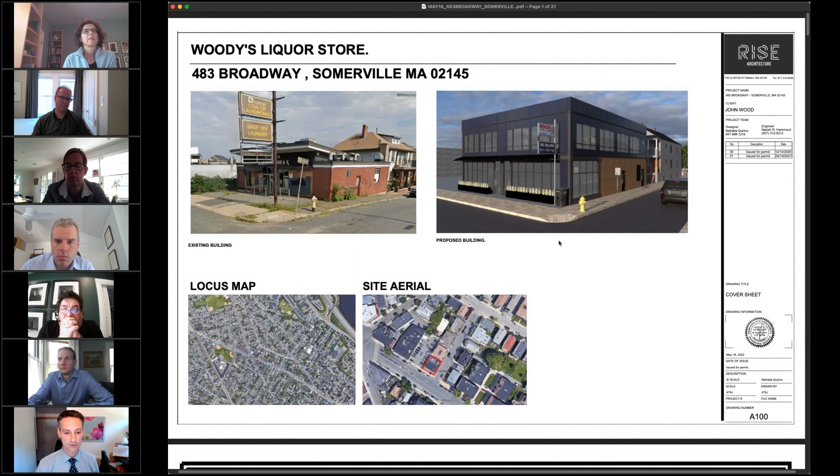Yes, excellent. So aside from the trash can located here, I think the exterior view of this has been updated. I think we discussed last time that might be a city trash can along the street as opposed to one in that location.

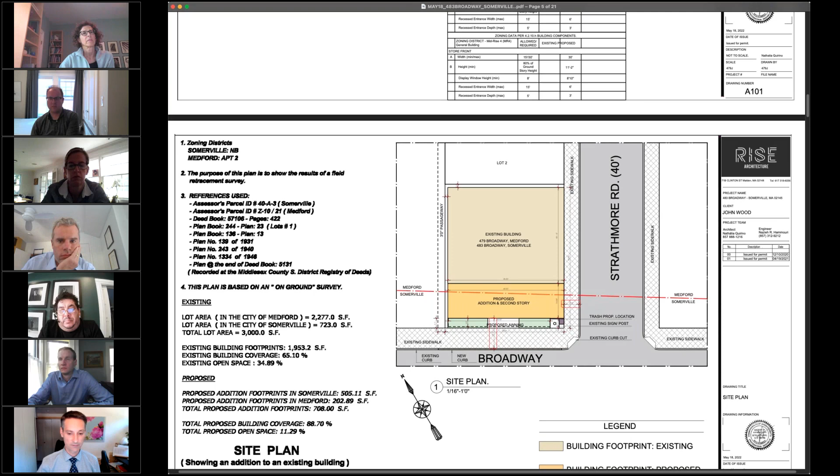I think the last rendition had a question about the distance of the building back from Broadway, as well as the sidewalk on Strathmore. So I'm going to zoom in here so you can see that we do meet the front requirements. I think the minimum is 12 feet from building to street, and right now we have 12 feet 7 inches, located here with this revision cloud.

The existing sidewalk is 6 feet 4 inches on Strathmore Road. I believe that came up because we have a door on the side that would be used for stocking the refrigerated area on that side street, so we'd be carrying down boxes and things on a two-wheeler into the space. Let me just zoom out again.

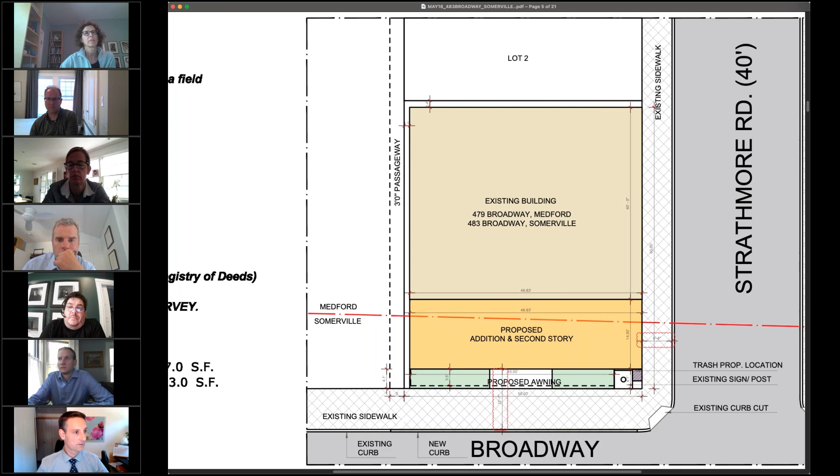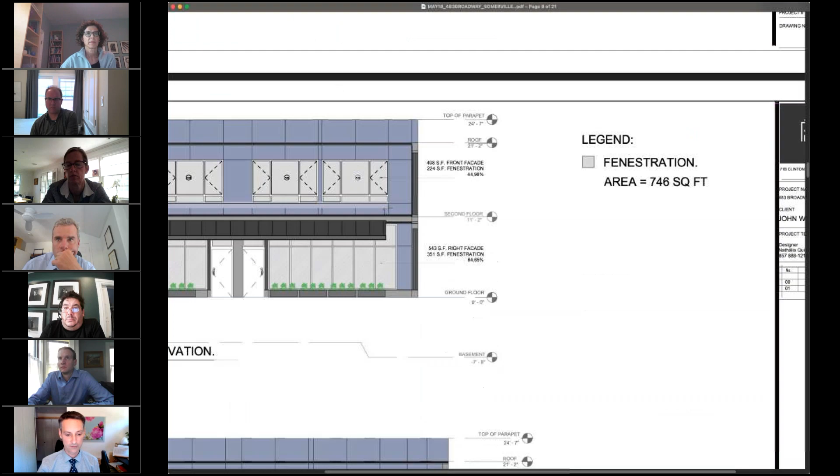Going down to the elevations here, this is where we had some changes. One of the things we wanted to do was revise the window layouts to be more symmetrical, at least with the floor below as well as with the entry doors right to left. So what we have now is a symmetrical assembly with the windows being the same on either side.

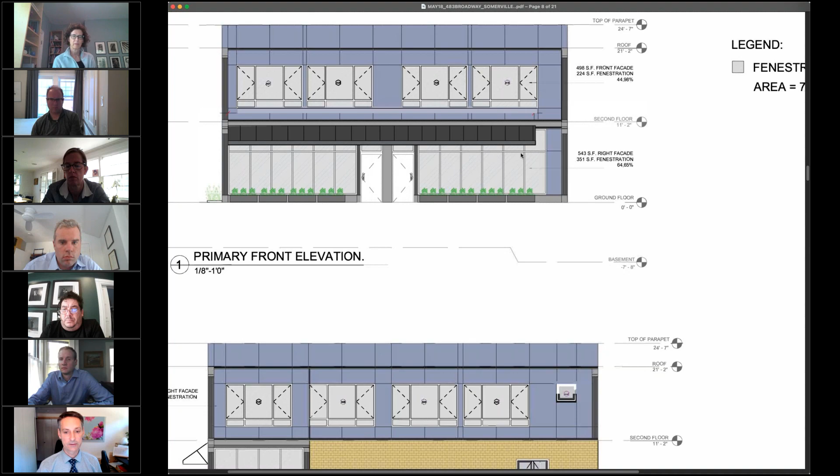Even though the space is slightly larger on the liquor store side, the symmetry exists between the upstairs windows, the downstairs windows, and right to left as well, and dividing of the lights to match the top of the doorways along here. That change was incorporated as well.

Looks like the awning didn't quite come across on that picture, but we're going to go down to the rendering here, which does contain the overhang coming out and across all the windows here. So we were changing the materials to be more in line with some of the more contemporary buildings. We'd be looking at perhaps an aluminum cladded paneling system around the windows and top.

But these colors were, I think, the ones that you guys preferred last time. And we did make some adjustments to the windows upstairs as well to reflect more of a commercial space.

I think there was one more change we made on the grass on the side here. As opposed to particular plantings, we just would have whatever we can get to grow on the ground there—maybe some grass or tall grass along the side, because we don't have a lot of space to work with, but we want to get as much as we can in along the side of the building.

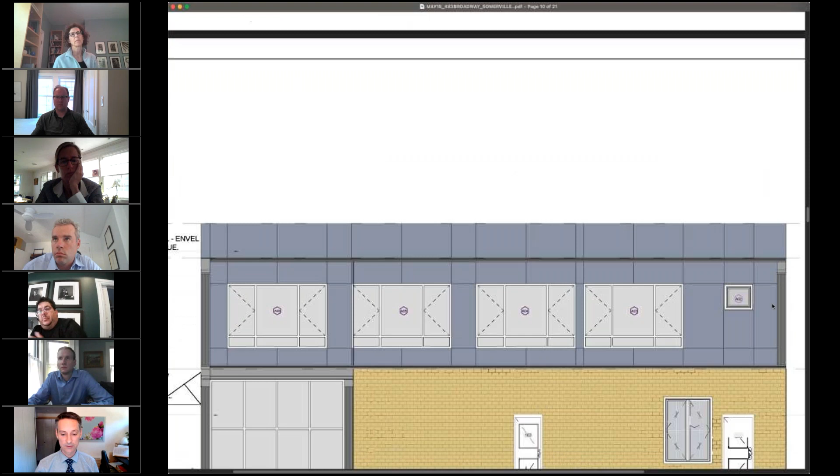So those highlight the changes we've made to the set and the elevations. Happy to take any questions as to what we've presented here.

You guys mind if we start with the landscape? Andrew says yes.

So a couple questions. One is, are those planters going to be irrigated? Because the position under the awning is absolutely going to limit the amount of rain they get, and even just being in planters is sort of problematic. So what is the plan for keeping that vegetation alive?

So the actual system itself we haven't really fully developed what it would be. It could be one single planter with irrigation built in. Right now we're showing smaller ones just because it creates a little bit different look, but I think the idea would obviously be to have them grow. We want them to grow, so whatever would be necessary to make that happen. Just trying to find my notifications here.

Okay, and the species that you specified, I was a little confused. What are you proposing? Boxwood in the planters, and then what is going alongside the building?

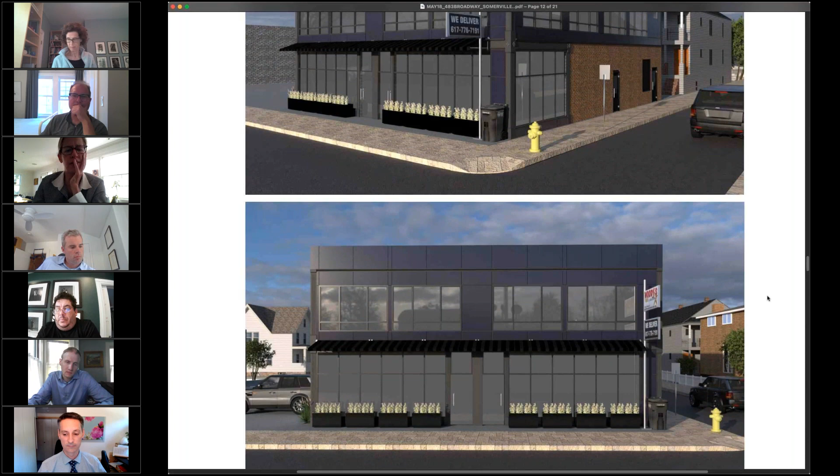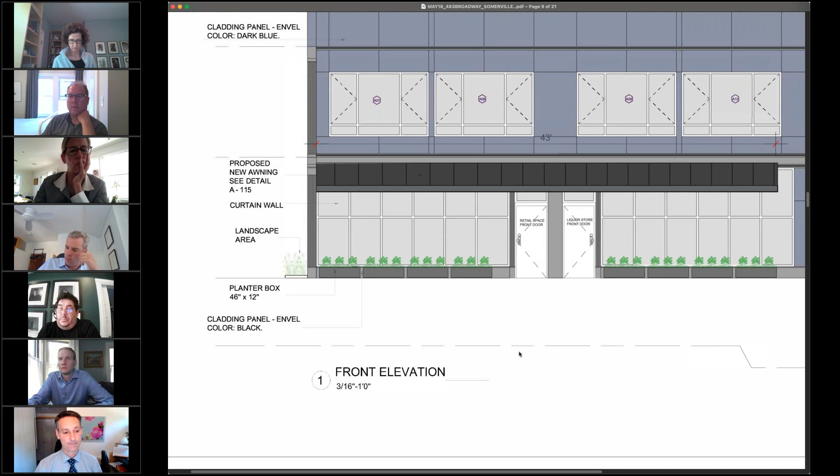Well, there was some concern last time about what would grow along the side, because if you look at the site itself, what we can actually work within is really about a foot, even though there is a 3-foot buffer beyond that. We can't really do anything in that zone ourselves, so we have about a foot to work with. Whereas there's really 4 feet of open space there, we really can't plant too much in that space. That would definitely work, based on what we have to actually plant.

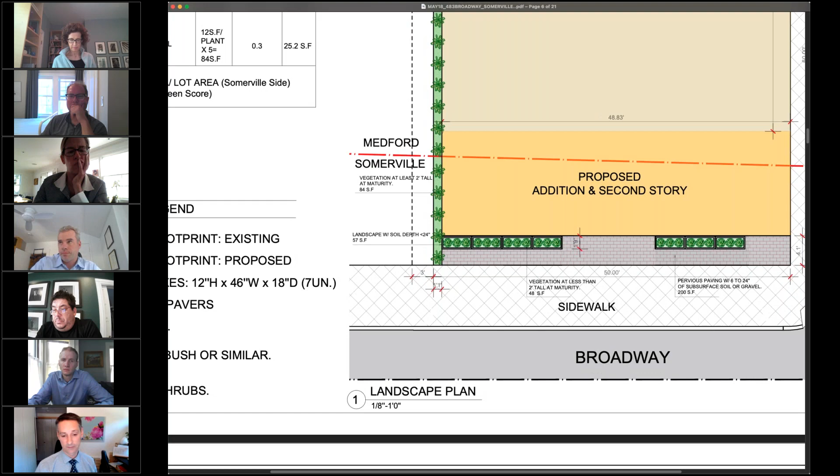So here you'll see we have the 3-foot passageway, so nothing's going to get built in there, but we only have a foot really of ground to work in. So with that, we have basically grasses I know would grow in that small space that we could actually plant, but we don't have too much room. We don't want anything to be right up against the building either. So the idea is to just plant as much as we can in that small space that we know would survive. And so my thought would be grasses might work there, tall grasses.

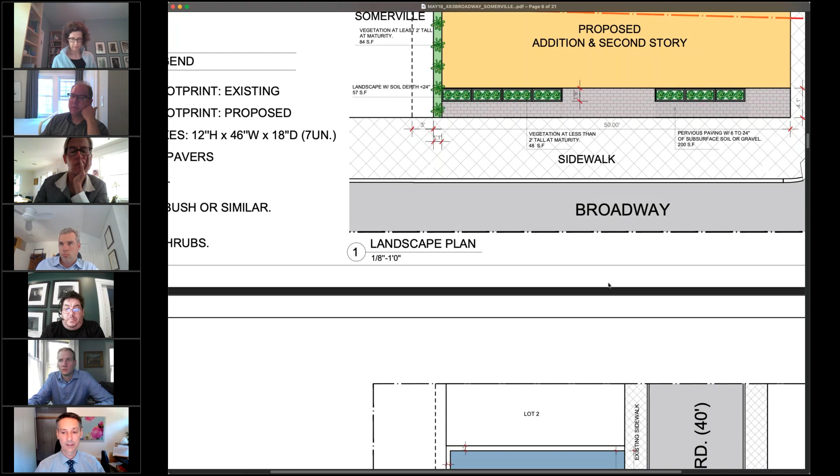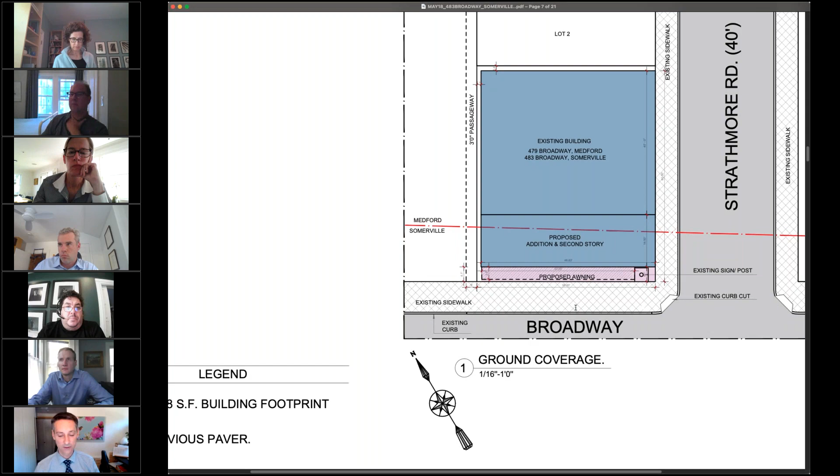As far as the planters, I haven't talked to the owner about what particular plants, but I do know that things like boxwoods and other small shrubs work well there if they're irrigated. We are facing, I believe, the south side here. Yeah, so that is the south side for the most part along there. So we do get a good amount of sun. So with the right irrigation, things should grow well there. But we don't want them to be too tall either.

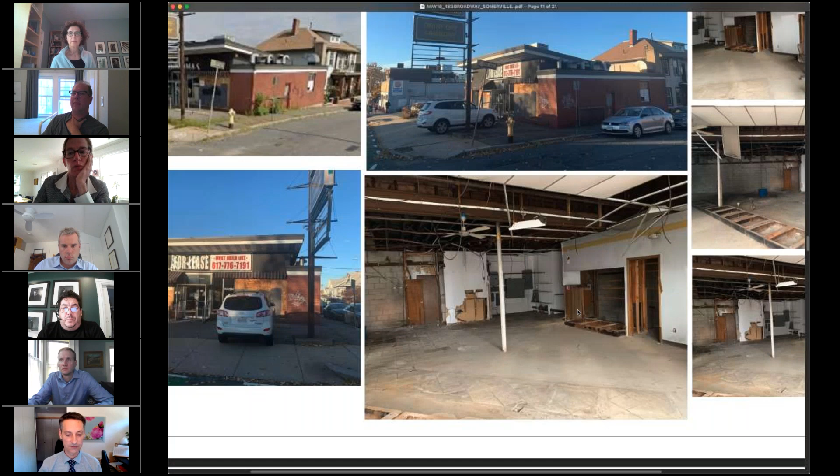So I think understanding what plant species you're proposing is pretty important, actually. And I think they do need to be native. Is that right, Louisa and Andrew? Not a requirement, but it's strongly encouraged. Yeah, okay.

I don't know about grasses on the side there, to be perfectly honest with you. I think that's a maintenance hassle and a rat superhighway. I just feel like, I know you only have 12 inches, but to be thoughtful about it, you could look at some sort of armature on the wall that has vines growing up it. It could be a really engaging, beautiful facade that would really improve this part of the neighborhood.

I think it feels a little bit like a throwaway. And then I would just add, I think this area deserves streetscape, some attention to streetscape here. You have a generous walkway along the front facade, and to have nothing there feels like an oversight. Street trees, again, would make a huge difference here.

And that was one of the things we had talked about in the previous meeting, I believe, was working with the city to figure out where the trees would go, because that street does have trees already. And so we did want to discuss where we could place those. I mean, it's obviously outside of our build area, but it is something that we also would like to see. And that's not represented here, but it's something that we certainly want to have discussed with the city, because down the rest of the street there are trees regularly spaced, and we want to continue that. So at this point, we're not showing it, but that is the intent for the street for sure.

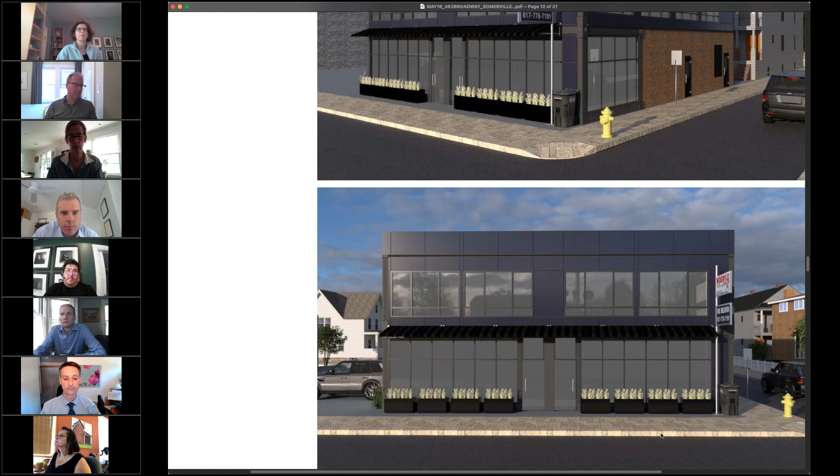I agree with prior comments about the streetscape all the way to the curb edge. I think that's typically in this district the responsibility of the project proponent to meet zoning guidelines for sidewalk width, to incorporate those streetscape standards. So I think we want to see those on the drawings and on the plans.

Can you talk a little about what's going on at the corners of the buildings? What appear to be black columns or piers, what those are, and then also the banding at the, call it a cornice.

I believe the architect is on as well. I don't know if she's available. But yeah, those are trim details. I think it's partly going back to a classical look with a modern kind of combo. So I don't know if she's available to speak or not, but Natalia is her name. She did the drawings.

You know, there are elements of old meeting new. We have the old building in the back here with the brick, and then obviously the new materials that we're building and extending. So, yeah, what was that?

I don't know if someone was on or not, but yeah, that'd be trim work, casing there. That would be more of a classical combination. So, is it wood? Is it? It would be a vinyl product, so it wouldn't be a wood material. No.

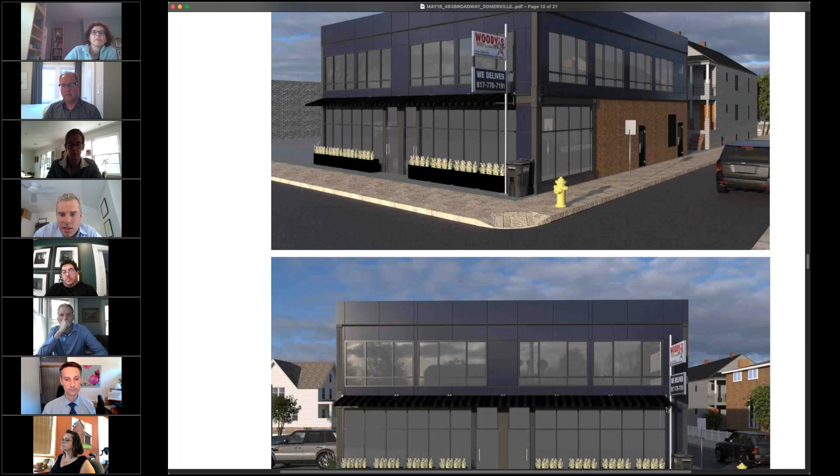I think one could create a symmetrical facade, but there's kind of a rhythm and scale and proportion that I think the architectural elements need another round of refinement to get the scale right. If there is a solid piece at the corner, perhaps it should be carrying through around the corner, if the idea is to pick up on a classical architectural element in a pier, for example.

So there's a design guideline that specifically says the selection of materials, fenestration, and ornamentation should result in a consistent and harmonious composition that appears as a unified whole rather than as a collection of unrelated parts. And for me, the design isn't meeting that guideline yet.

So in that case, we have essentially two styles coming together, or two materials. Is there a way to resolve that without contradicting that requirement? I think there certainly is, but I think that's something that your architect needs to show us. We're not going to prescribe what that is.

The classical detailing, I don't quite get it, but maybe there's a good reason for two things happening here. And it's enough to be a counterpoint to the brick wall, which it doesn't look like it has any detailing in it. It's a pretty simple brick wall, isn't it?

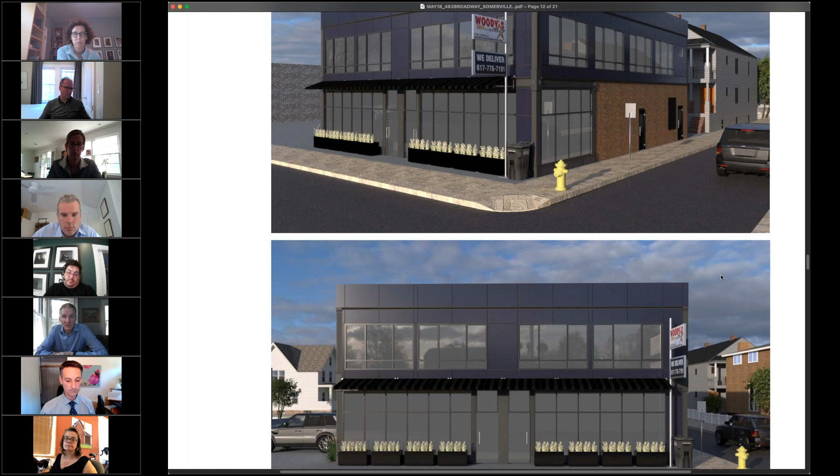I would probably echo a lot of the statements that have been said. Tim made a good comment about the corner. I actually didn't see that because the sign was hiding it in the elevation. But just because it's at the corner of two streets, it's kind of a highlight element of the design. So that corner kind of stands out as being a little odd, being the backdrop for the trash and the sign, and being kind of this two-story solid expression. And then on the other side, it's more like a thin pilaster.

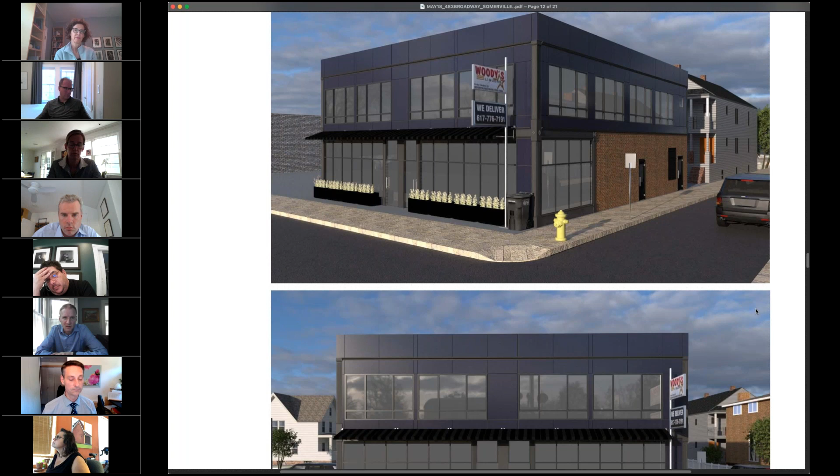So there is a little bit of different treatment going on there. Maybe a little bit more thought about that corner could happen. So I would agree with that. I also think that it looks like, I can't really tell, but maybe the pilasters are fluted, kind of more like classical detailing.

And trying to talk a little bit more about that old versus new, I would echo what has been said. It seems like that language is fighting a bit with the new modern language. So I'm not sure if it just wants to stay down at the first floor and not go up to the second floor, or maybe be reduced and let the more modern expression take over.

But it seems like an additive add-on. It doesn't seem harmonious right now with the rest of the design. And at the top of the building there's a datum line. It has more of a heavier top, and I was just thinking it might need a little bit more of a finer detail at the very top. Maybe just a little small eyebrow there, just to cap it.

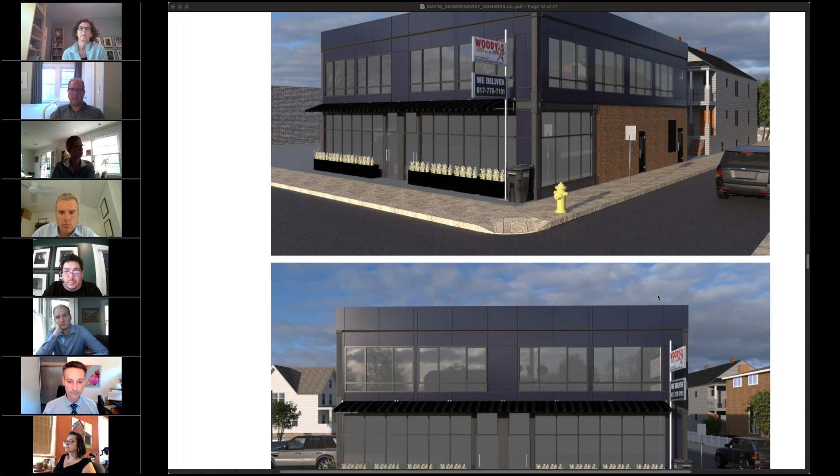My intention with the strings that I have on the side, on the top of the glass, is because one of the guidelines for MR4 is also to have a separation between the first floor and the second floor. And I tried as much as I could to follow the examples and pictures shown in the zoning for MR4, to have the same look as shown. I have no intention to have a classic design to show a difference between the old and new - it was just some trim to separate the first floor and the second floor.

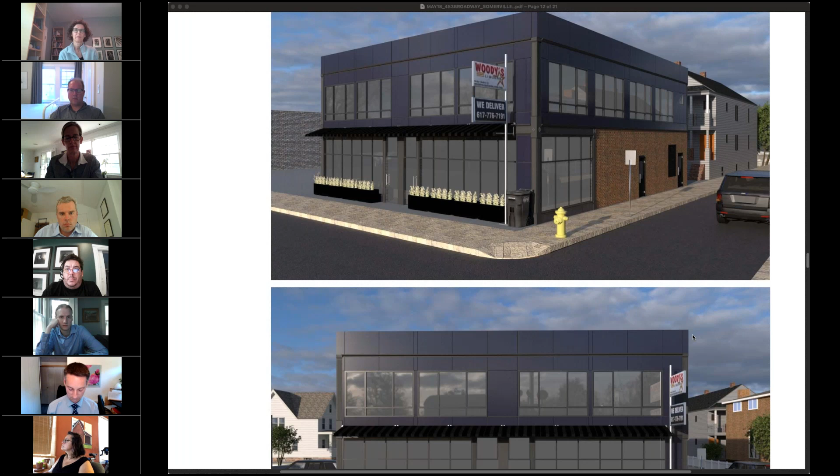The reason why we don't have the glass all the way to the corner is also because of the sign and the trash can, and it's also where we're going to place the cashier inside for the liquor store. So those are my comments, but I can definitely try to work on a better design with more modern looks for the corner. I just feel like these columns that you guys are talking about are very similar to what is being shown on the zoning ordinance.

Are there any other comments about this project? I think just not so much a comment, but just something to note moving forward.

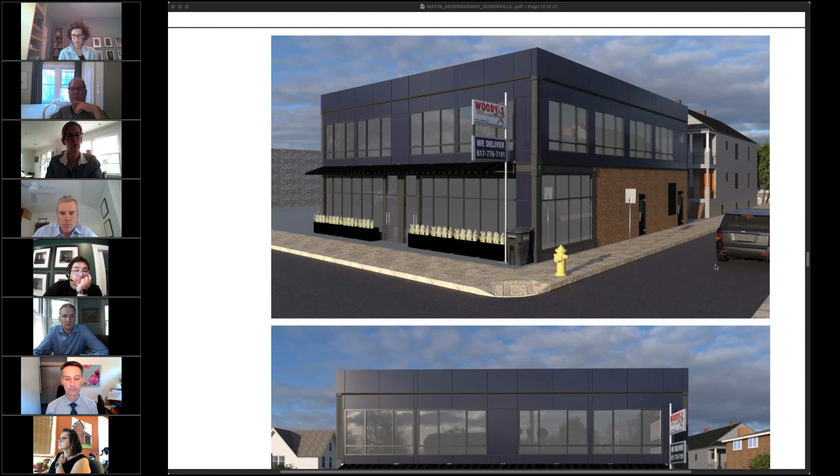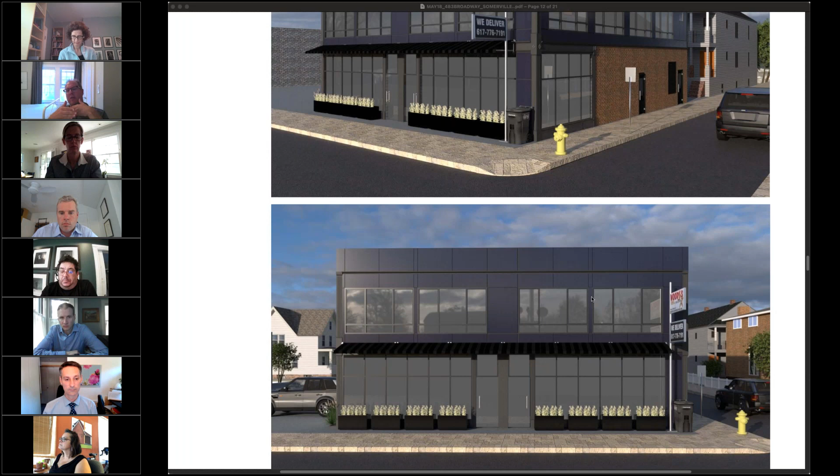I'm not really seeing any grading information, and the site is being rendered as flat, but there is a subtle grade change as we move towards the Salvation Army. So as the building moves forward, there should just be some verification that the space we're losing isn't triggering any sort of ADA cross slope issues.

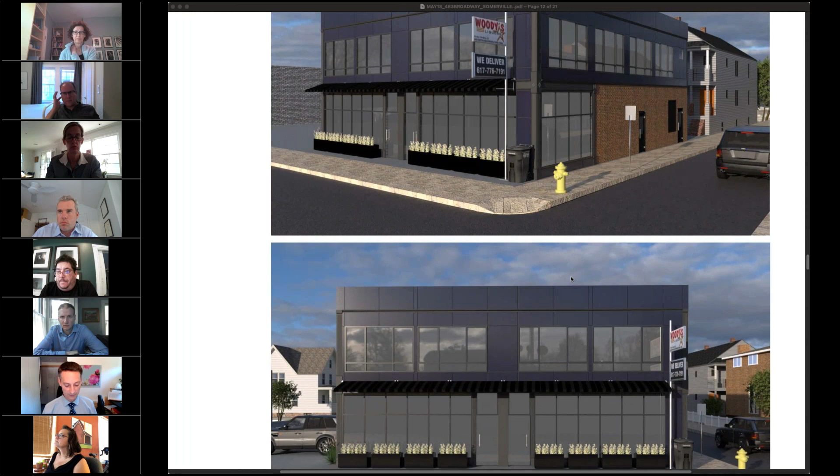As far as the site we are developing, we have the room to accommodate for that between the street and the sidewalk, I believe. So it is very slight, but we'll make sure that that's covered, as it will be a requirement.

Are there no other comments? The one thing I will say to the design team, as Director of Public Space and Urban Forestry, is to please pay attention to the design standards and the green score that will guide the streetscape that some of the commissioners have mentioned. Will do.

At this point, we have two votes to take. The first is whether or not the design guidelines have been met for the MR4 district. And I need someone to make a motion. So would I make a motion that the design guidelines had not been met, or would I make a motion that they had been met and vote no?

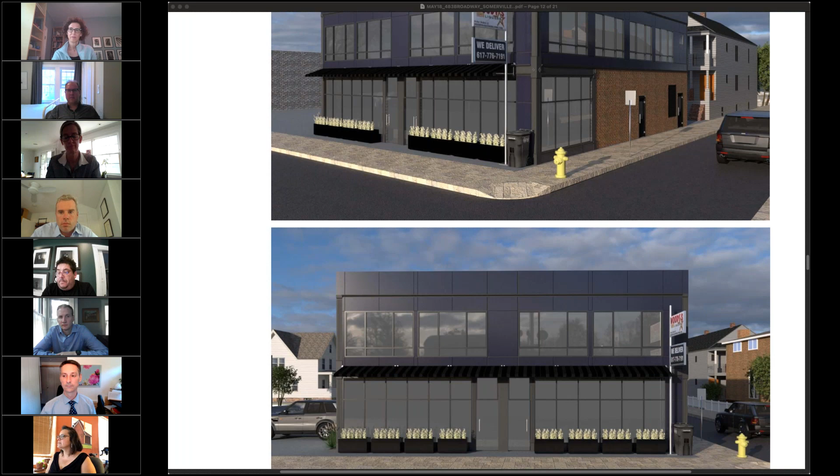Okay, the motion has been made that the design standards have been met for the MR4 district, and we will do a roll call vote of the commissioners to determine that.

Frank Valdez, no. Andrew Arbog, no. Tim Talon, no. Deborah Fennick, no. Sherry Ruane, no. Tim Hood: I would vote no, but I don't think I'm eligible because of the full commission today.

Thank you. That said, there's a unanimous vote by the commission that the MR4 district guidelines have not been met. So the recommendation would be that the team go back to review those and reach out to the different city agencies that can help in fulfilling some of those requirements.

The second vote was to incorporate any additional design guidance. Do we still do that if we voted no? Yeah, I would say since there was no additional design guidance given other than this doesn't meet the guidelines, that we do not have to vote on that.

I think someone has to move that the team should return to the commission with a more completed application. Do they have to return, or does it just go forward with a no vote from us?